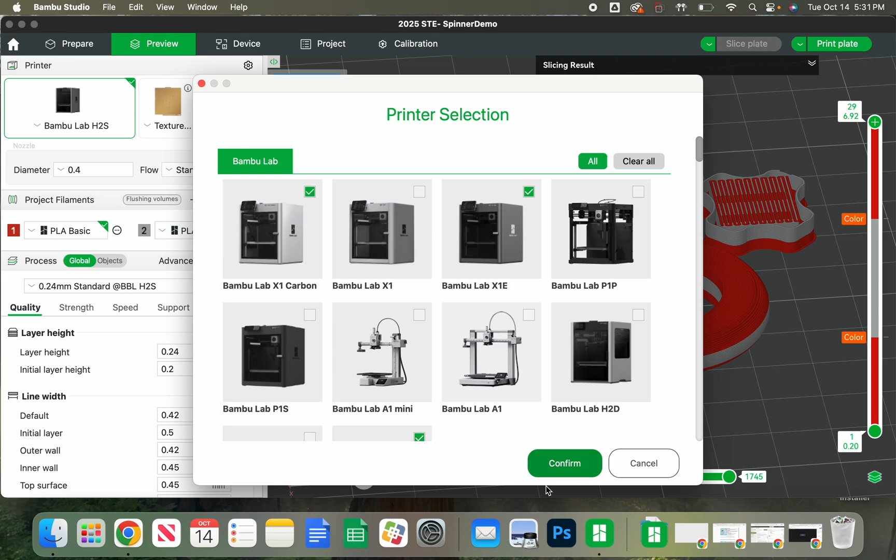So if we have to do a lot of overflow printing, if we can't get all of it done on the three printers that we have in this room, it's nice to have these kind of in our back pocket at the ready. So with those three printers selected, I'm going to hit confirm. The next thing you're probably going to see is your filament selection.

So in your filament selection window, once again, we're going to hit clear all. I want to scroll down, and I'm probably going to have to scroll over to find Bambu PLA Basic. That is the printer filament we're going to be working with. We do have access to other filaments, and we can purchase other filaments. We can get into carbon fibers and glass reinforced and nylons and ABS and all these things.

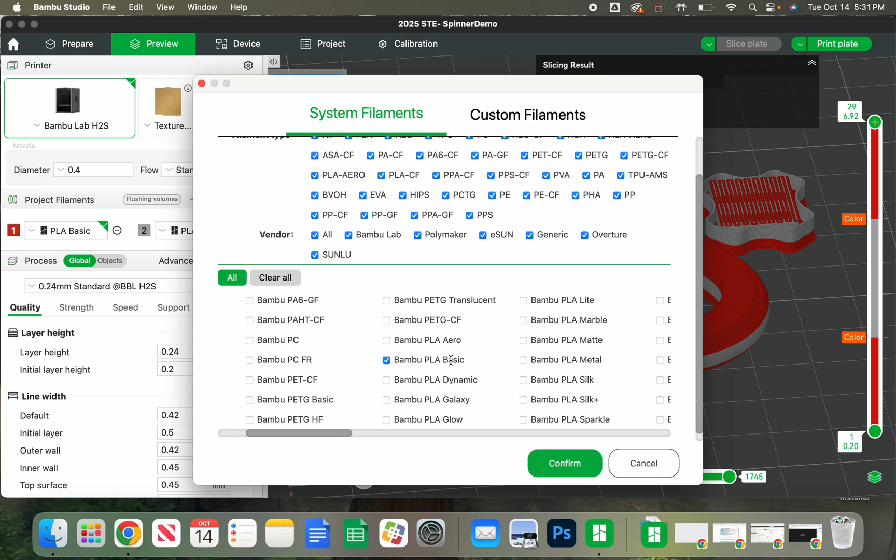But for now, as a starting point, we're going to start with just PLA Basic. So that should be the only one I have selected. I'm going to hit confirm. With that done, the next thing I want to do is I want to come up here and I want to make sure that I have the H2S selected as my system preset.

I want to make sure that my build plate that I'm using is the textured PEI plate. That's what we have in those machines right now. And then I want to come down here where it says diameter. I want to set my nozzle diameter to 0.4. It's possible these are already set for you, but if they're not, we want to make sure that we're all working from the same settings.

Our flow is going to be a standard flow nozzle. I do have some high flow nozzles, but we're not using those for this. If we were doing something really big that used a lot of plastic, we might want to use a high flow nozzle and a larger diameter, because it could print faster. But in this case, 0.4 is really the standard nozzle diameter that you're going to get with almost any 3D printer you buy.

So now that that's done, I'm going to come down to my project filaments here, and you probably only have one filament, and this is going to be a two-color job. So we're going to hit the plus symbol and add a second filament color. Now, to set up your filament colors, I'm going to click on this little swatch to the left, and I'm going to choose the filament color I want.

Keep in mind, I do not have any of these gradient colors. So these colors that go from like white to red or from blue to pink, I don't have any of those. So don't select those. What I do have is a lot of these solid colors. So black, gold, turquoise, I have a little bit of turquoise, silver, I have the darker blue, I have red,

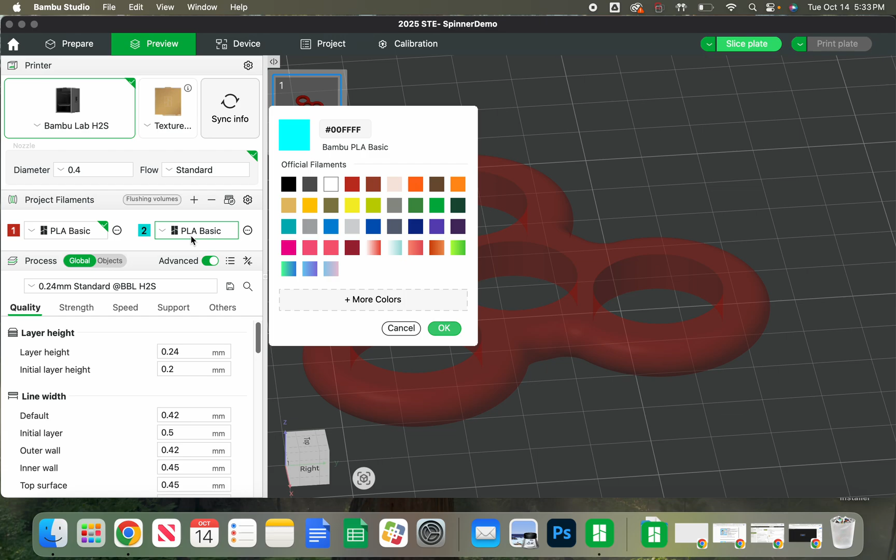Okay, so for my first color, I'm going to use the red, and I'm going to click OK. For my second color, I'm going to click on this swatch, whatever color it is, and in this case, I'm going to choose gold. And then I'm going to click OK.

So the last thing I'm going to do is I'm going to go to my printer profile. So this print profile or system preset sets up pretty much all of the settings I would need to run the job, but at different layer heights. So I can use a really slow, really refined, high quality 0.08 millimeter, which is going to take forever, or I can use 0.24, which for what we're doing is going to be the fastest I can do with this 0.4 millimeter nozzle, and it's going to have a lower resolution, so the quality is not as good.

Does that matter for us? No, for what we're printing as a fidget spinner, this will be more than adequate layer height, and it's going to mean we can print these quickly. With a full class of students that need to print, speed is definitely going to be part of our equation here. So 0.24 millimeter standard is what we're doing here.

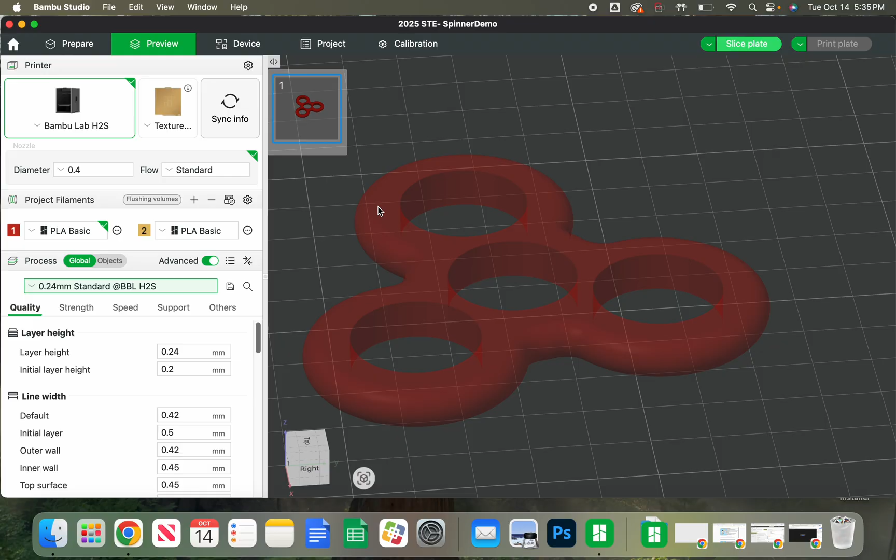And then let's show you how to bring in your geometry. So we have everything set up for the printer, the nozzles, the filaments we want to use, the layer heights we want to use. Now you need to know how to bring in your geometry. So if I'm on the Prepare tab, I'm going to select the geometry I have here right now, and I'm going to delete it so that you can see how we bring it in. When you first start off, this is probably going to be your default. If you've grabbed this and moved this around, you can always go up to your View menu and go to Default View, and it gets you right back to that same view.

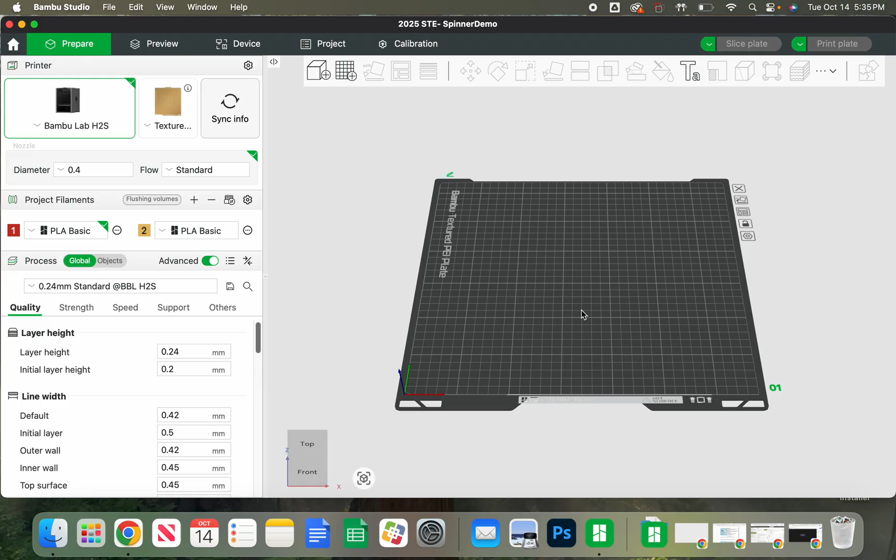So I'm going to go to File, and I'm going to go to Import, and I'm going to import a step file. So you can see my step files are listed here in this list. Now if you didn't export a step file out of Onshape, ask one of your classmates, ask your teacher. That's not a hard thing to do. It's pretty quick and easy. So here's my step file that I downloaded from Onshape. I'm going to hit Open.

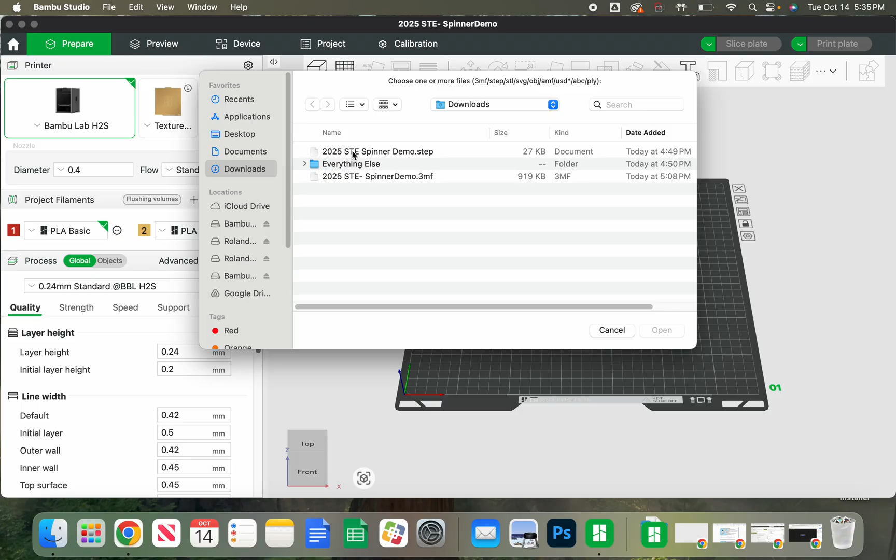This is going to ask you, how do you want the slicing software to interpret the geometry that you have? So I'm going to hit OK. And if you want that to not come up again, you can check off where it says Don't Show Again. And then it's just going to use those same default selections every time.

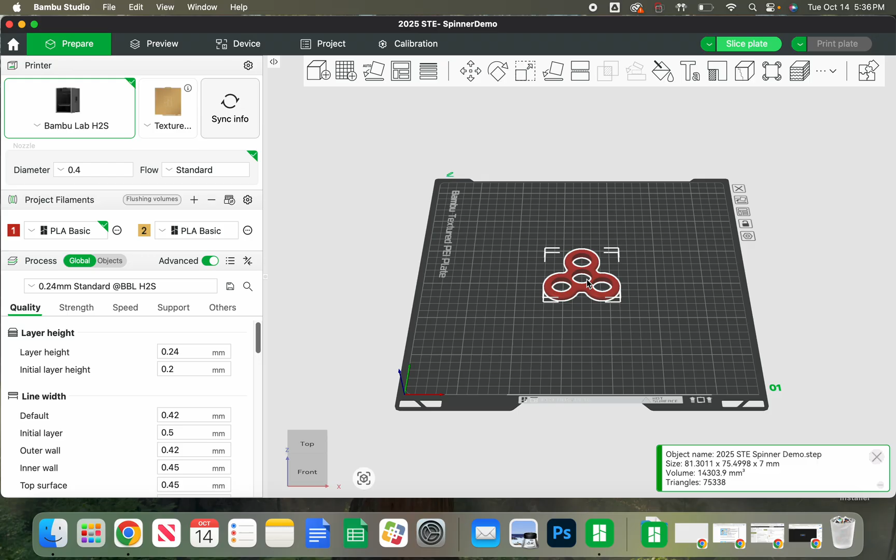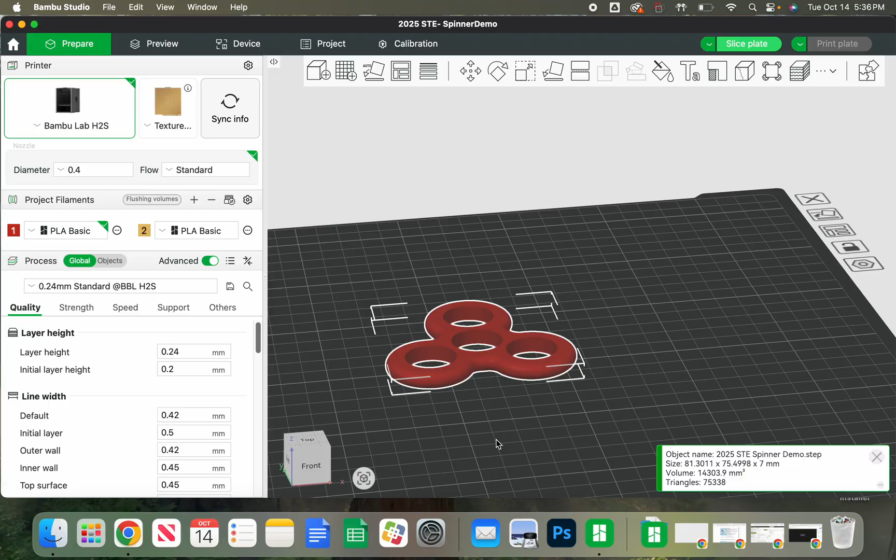So now I have it in here. I'm going to zoom in by using the scroll wheel on my mouse. If I want to orbit, I can click with my left button anywhere that's not the object. If I click on the object, it's going to drag the object around. If I click anywhere else, it will orbit my screen, allowing me to rotate to all these different views. If I right click and drag, it allows me to pan, which means I can drag my build plate around. So let's go back to the default view, zoom in a little bit, and then we'll pan this down.

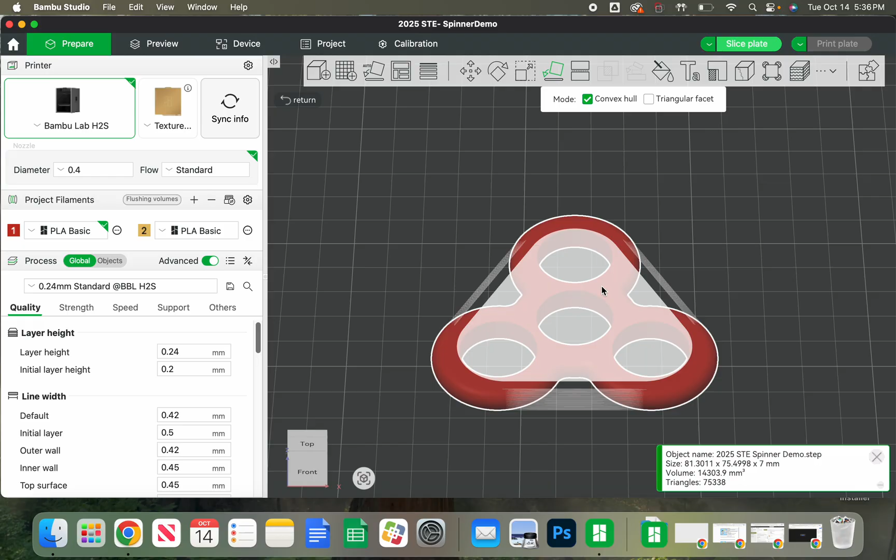So now what I want to do is I want to make sure that this is sitting flat on the build plate. With it selected, I'm going to come up here to lay flat or lay on face, and I'm just going to choose the top face. In this case, the top face is the most strategic one to lay down on the build plate, or the bottom. In either case, it will print nicely with that orientation. What I don't want is I don't want it up on edge like this. That will not print nicely.

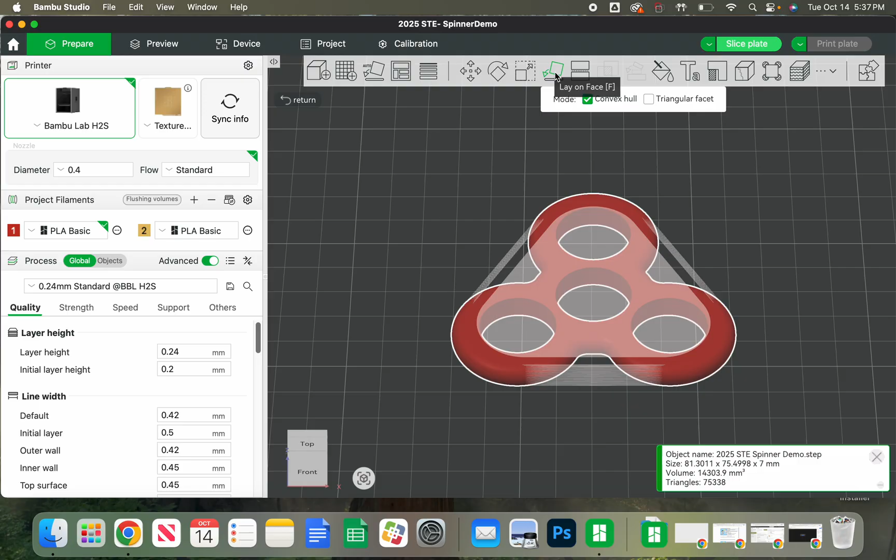And if I lay it like this, I don't need any supports. And if any of you have done any 3D printing before, you know that supports use extra material. It usually impacts your surface quality, and it generally is undesirable if you can get away without it. So now that I have that laid down the way I want, I'll go back up and click on that again and get out of that tool.

Next thing I'm going to do is I'm going to hit Slice plate. So that's going to go ahead and slice it into the different layers that it needs to print it. So each of these is a separate toolpath for the nozzle to follow along. And you can see as I scrub down with this, it gives me the chance to preview each layer.

I have a total of 29 layers. So at this point, what I want to do is I want to set up my multicolor. Ignore the fact that there's a color here already. All right, I'm going to get rid of that color change. Okay. So since there's 29 layers, there's two ways I can do this. I can come down halfway, which is at like layer 14 or 15, and I can set up my color change there, which gives me a half and half.

Or I can do what I like to call the Oreo method. An Oreo cookie has a top layer, a bottom layer, and filling in between. So that's what I'm going for. So in this case, I have 29 layers, so I'm going to split it up into equal thirds roughly. So I'm going to come down to layer 9 to begin with, and I'm going to do my first color

change there. So with this on layer 9, I'm going to right click on the plus symbol, go to change filament, and I'm going to choose filament number 2. And you can only choose the filaments that you've predefined. So if you don't have your colors set up, then hit the plus symbol, set up your second color. Now I'm going to drag this up to layer 20, and I'm going to right click again, go to change filament, and I'm going to choose back to filament 1.

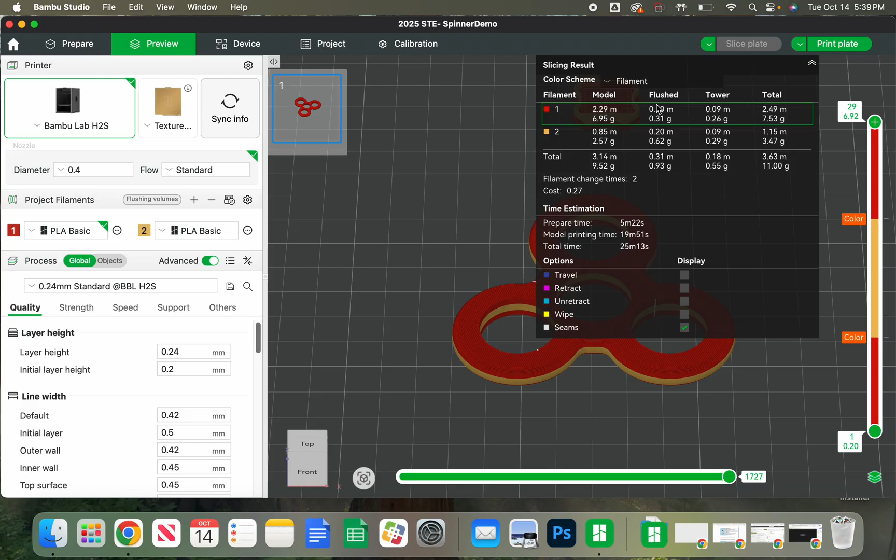For right now, I don't care about any of that information. What I care about is how much time it's going to take. So this is going to take just over 25 minutes, and that's fine. I'll send this back to summary. You'll notice it shows me it's going to take 25 minutes. And at the current cost of filament from Bambu, it's estimating that this is a 27-cent print. So now that that's done and I have my preview, I'm going to rotate this around.

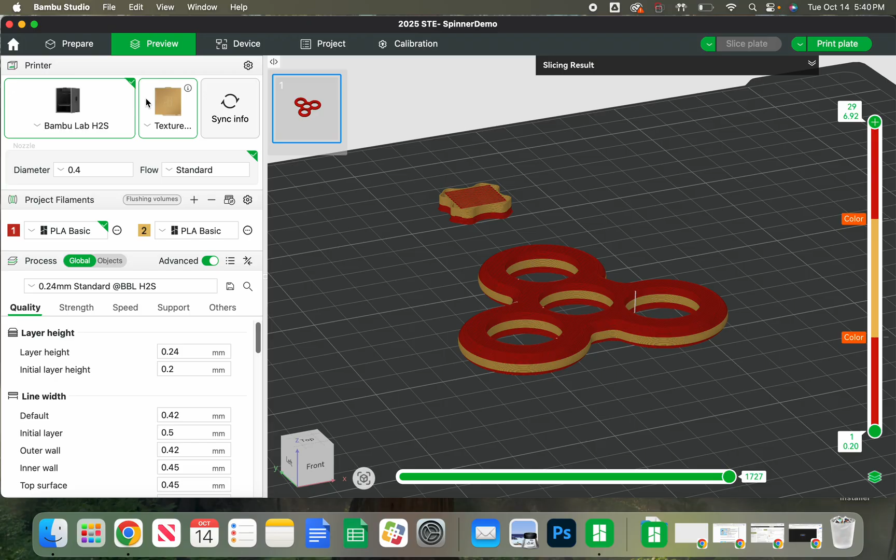Some things you want to watch out for. See this purge tower back here? It's right where I want it to be. It's out of the way. But what if it wasn't? What if you came in here and the purge tower was right in the middle of it? Because I have seen that. So if the purge tower is in the way, you have two options. Either A, move the purge tower or move the piece, or B, you could just go up here to auto arrange. So hit auto arrange and then arrange, and it moves it out of the way for us.

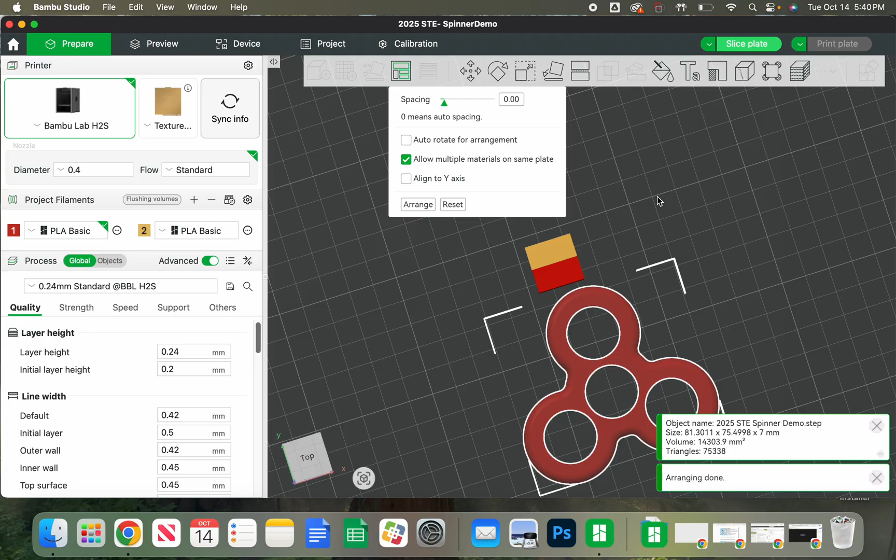Now, since I made a move, guess what? Since I made a move, I need to reslice. So I'm going to hit slice plate. Now it looks good. Everything's sliced. It's still 25 minutes and 12 seconds, so that's fine. So now what I want to do is I want to save this file, and I want to post it to the Google Classroom so that way I can send it to the printer for you on your behalf.

So to save it, we're going to go to File, and we're going to Save Project As. And then I want you to save it with the year, 2025, your name, I'm going with Senior Tech Ed, and then what the project is. In this case, it's the spinner. You'll save that to your Downloads folder, and then you'll go into Google Classroom. You'll find the assignment in Unit 3 where it asks you for your 3MF file, and then you will attach this or upload it to there.

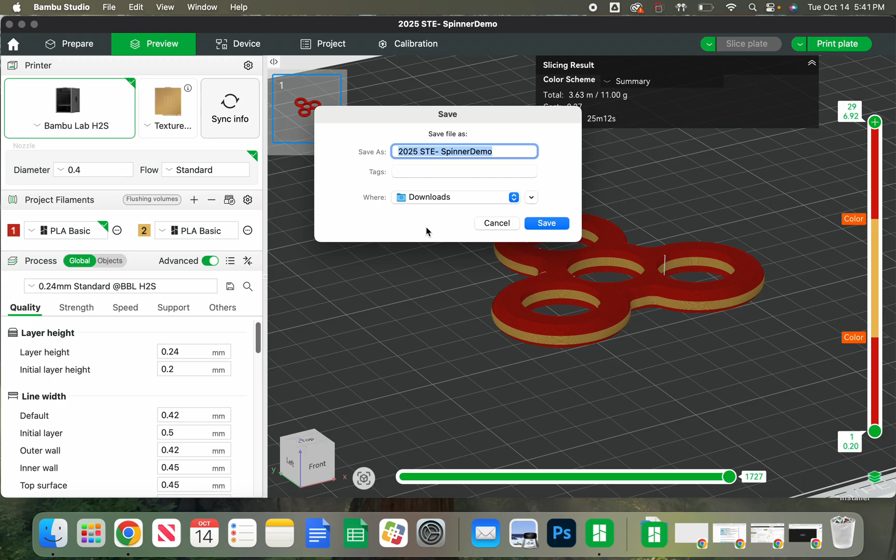I would also recommend you upload a copy of your STEP file. That way, if anything goes wrong, we have access to both. It also means it's all saved to the cloud for you. So hopefully that gets you set up. You have the colors that you want, and you're ready to go, and we'll get it printed straight away for you. So good luck.